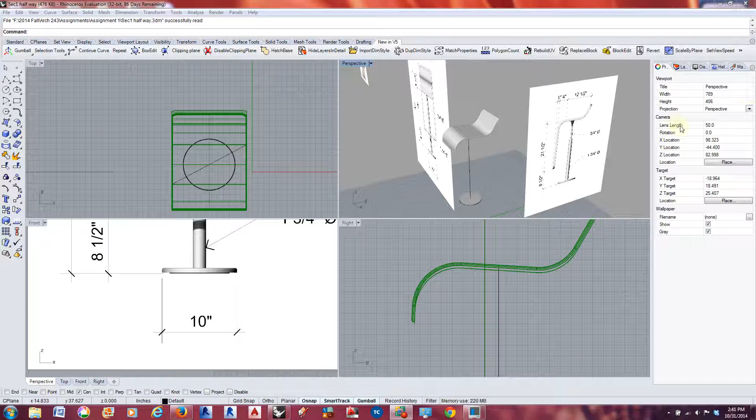In section 1 we pretty much went over creating the majority of the chair itself - the seat, the chair rail - and we got started on the base but have not worked through the rest of it. If you're in section 2, we got through some of the base but not the seat bracket, so this video will be a bit of a review for you.

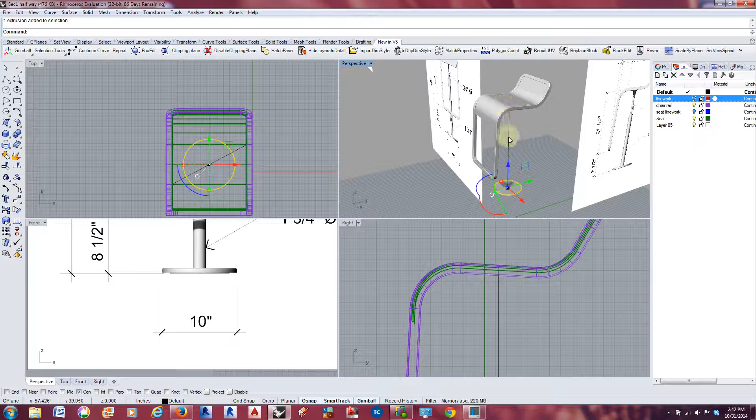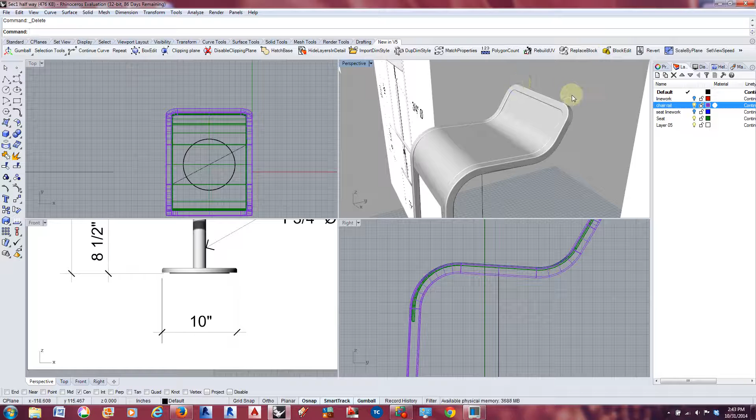I'm going to turn off my chair rail, and note that this little section here can be deleted as well - it does not need to be there. That's from when we split the line or the seat surface before offsetting it, which split this surface from the protruding one and left this little bit, so I went ahead and deleted that.

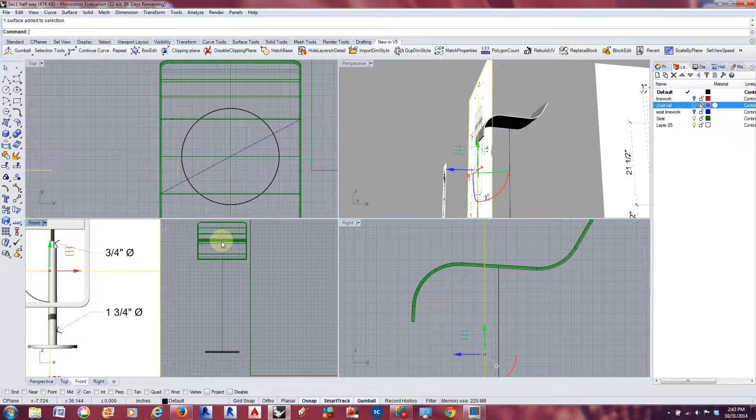In class we talked about getting this line work across the center mark so we could draw a 30-inch line from the base of the seat down, so that we could start creating our base for the seat itself.

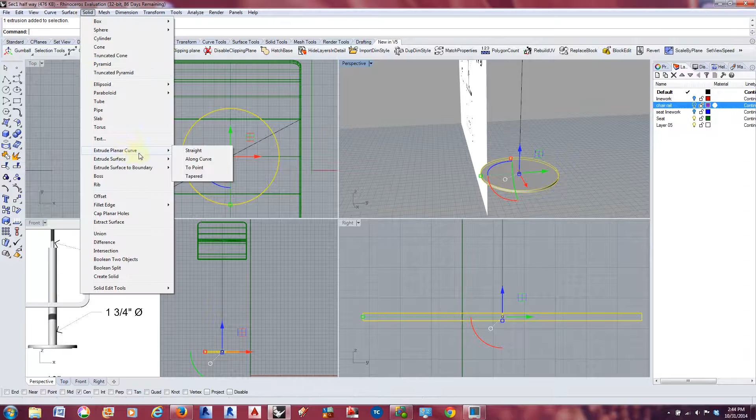We ended up creating a 9-inch diameter circle, then extruded it using the extrude planar curve straight tool to create the initial base, and now there's a secondary base on top of that. That thickness was 0.25 of an inch.

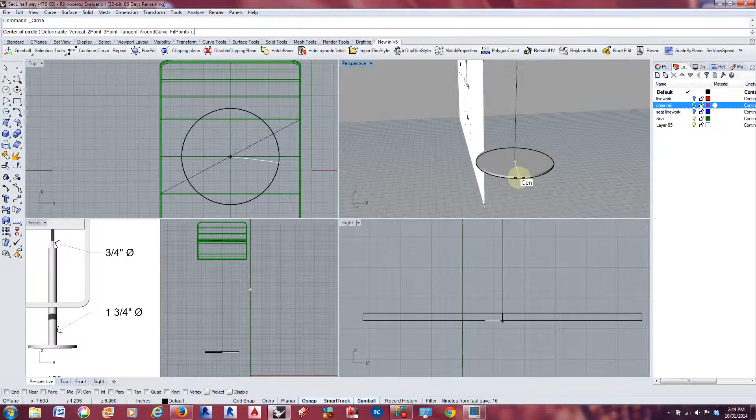Let's create an additional curve using the center snap - hover over the top portion to snap to the center of the top plane, then set our diameter. If it says radius, it'll be 5 inches; if you click diameter, it says 10 inches. You have to manually put that in though, so I'm going to use a diameter of 10 inches if you haven't already.

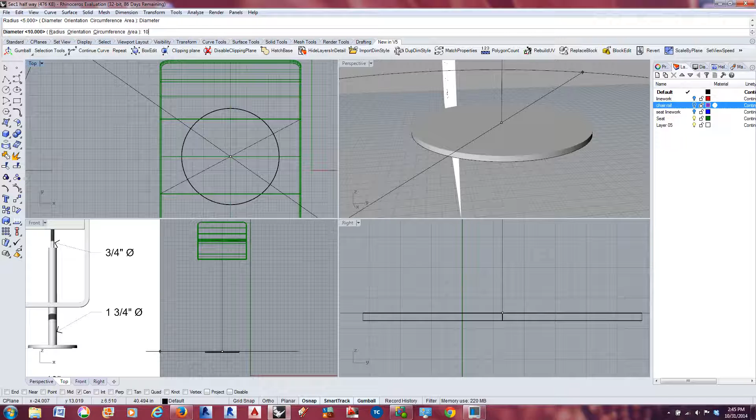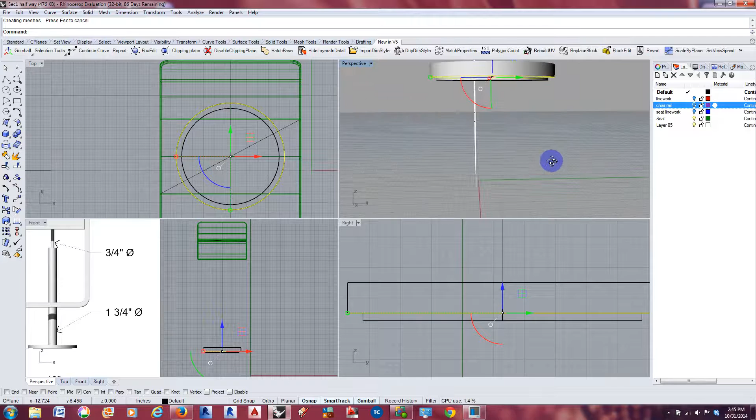It creates a 10-inch diameter circle, which we can extrude with planar curve straight, 1 inch. That gives us a nice solid surface there. Let's double check that's indeed what we wanted, and move it behind our object here.

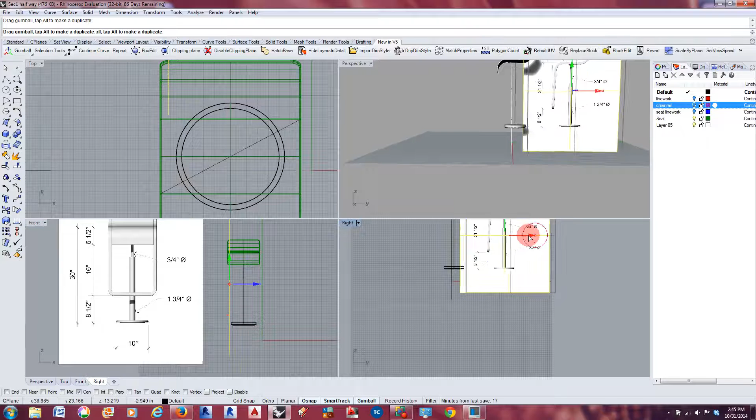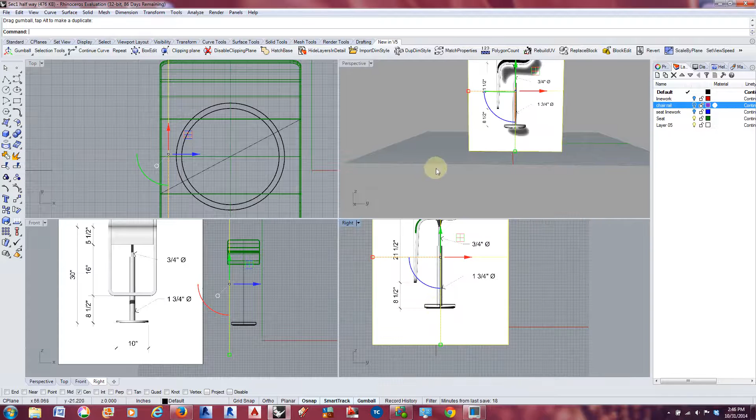Okay, well it looks like maybe it should be more like 1/8 of an inch and 1/2 of an inch, so let's just redraw those. I'm going to delete all of that.

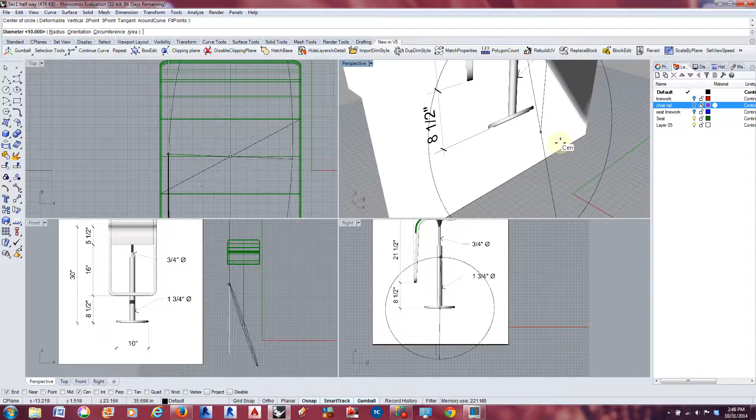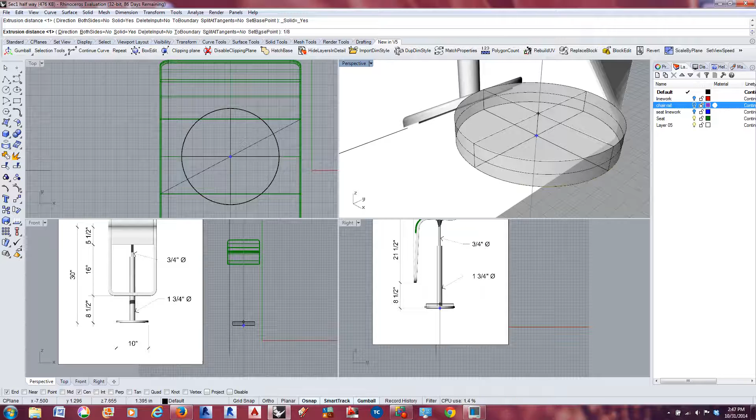I'm going to create a curve, circle, center radius, with end snap on, snapping to the end of that line we created. Again, a 9-inch diameter, then we create a solid extrude planar curve, and let's try 1/8 inch. That's starting to look a little better there.

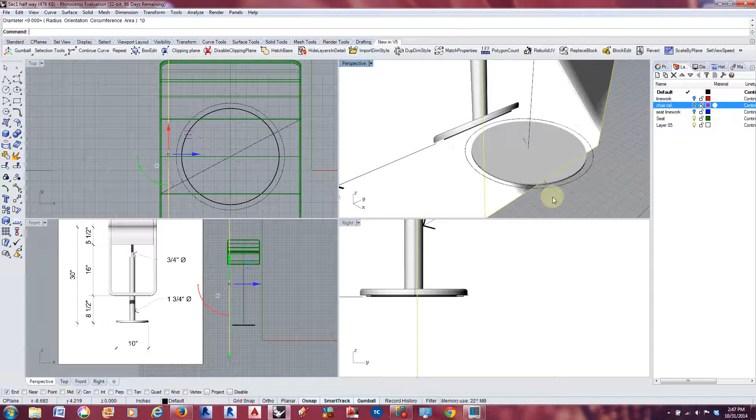Let's create another curve, using the center snap, and type in 10 inches, then create the solid extrude planar curve straight - we're going to try 1/2 inch this time. And that looks to be about right.

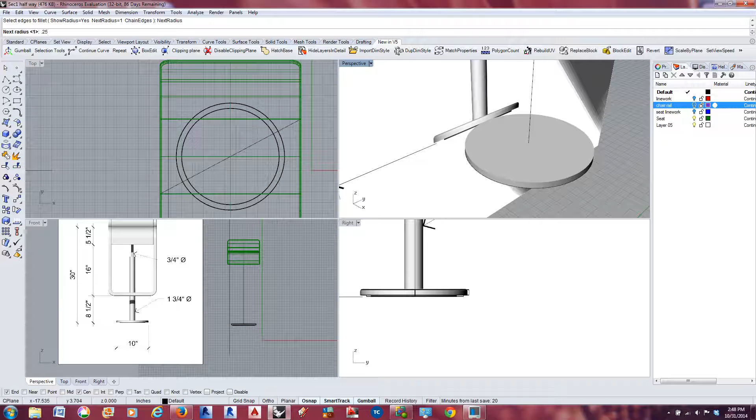So we can go ahead and fillet the edge, making sure our radius is probably 0.25 of an inch. We select that top edge, hit enter, and just put a slight curve on it.

The next phase is to create a cylinder that extends up this line work. In theory we could create a circle and extrude it up, but we could also just go ahead and create a solid cylinder in its place.

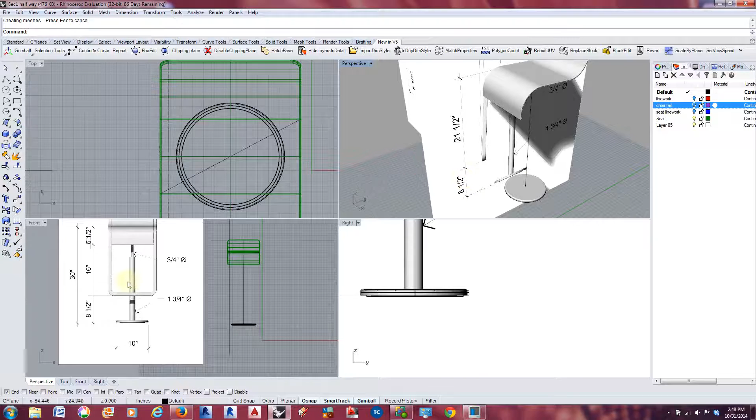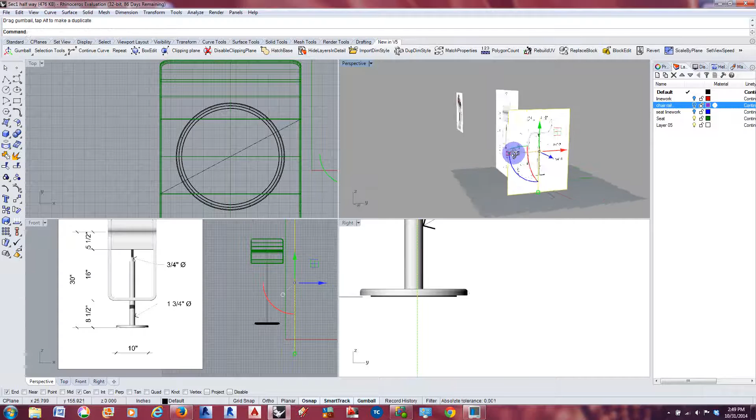But first I need to know the dimension between here and here, since we never made this section to scale. So I'm going to move this forward and utilize the dimension linear tool.

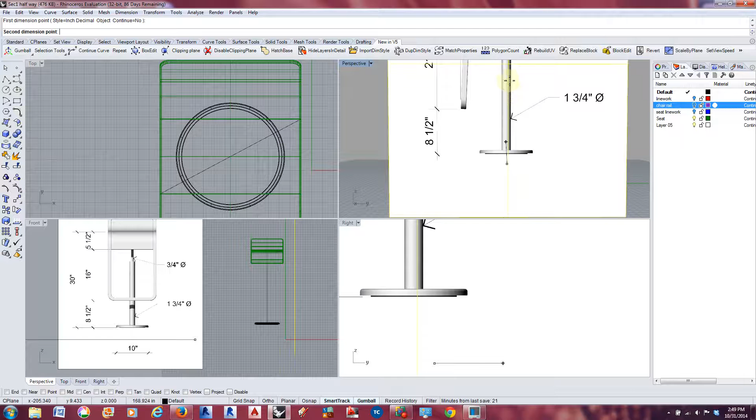I'm going to take off my end snaps and center snaps, and just figure out the dimension between the base of this - whoops, I should be doing this in my right side view. Let's right click to repeat the command, holding shift or using ortho snap to get that straight, and we can see that that's roughly 20 inches.

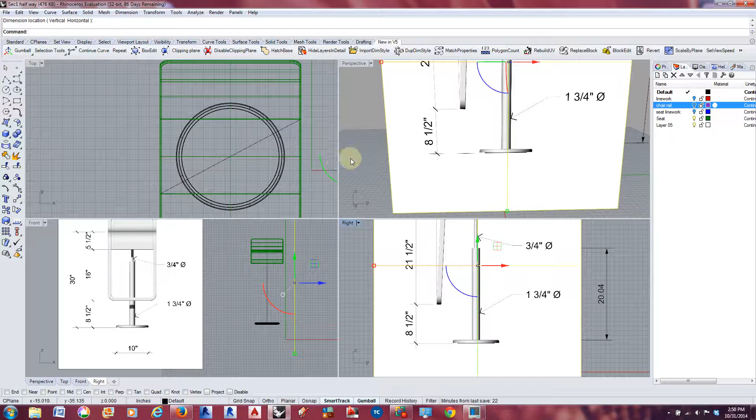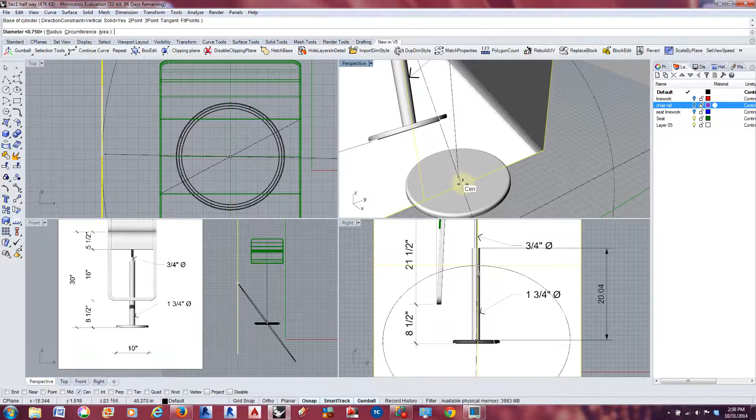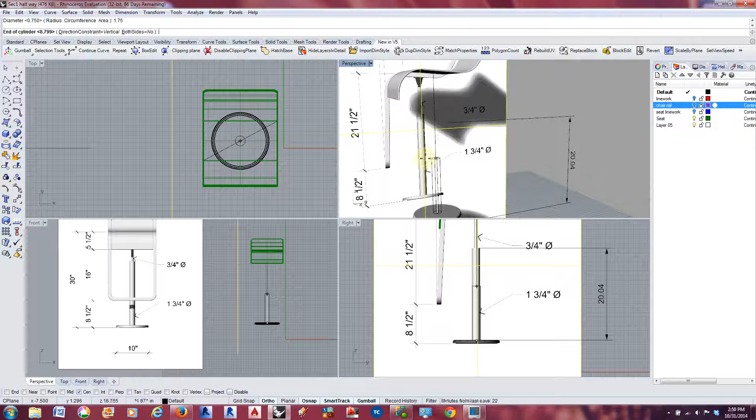Now that we have that information, we can create a cylinder. We'll turn center point snap on again and snap to the center of this line. From our drawing we can see we have a 1 3/4 inch diameter, so we type in 1.75 and hit enter. As we move this up, holding shift and the right key to pan in 3D, we type in 20, giving us the 20 inches we need.

While we're here, we can fillet this edge as well - let's go with 0.25 of an inch and see what that looks like. It looks fairly good, so we're going to stick with that.

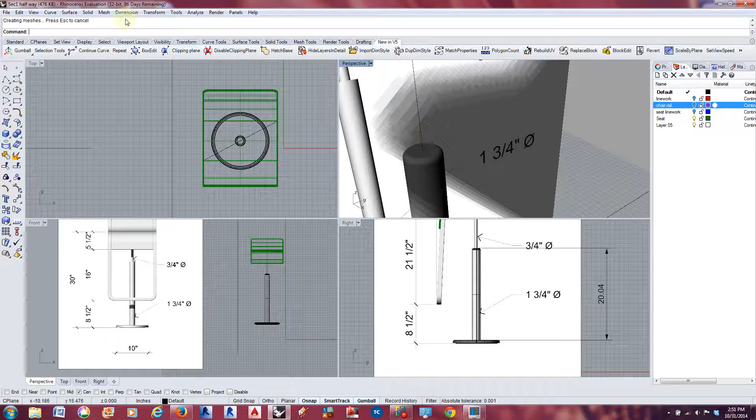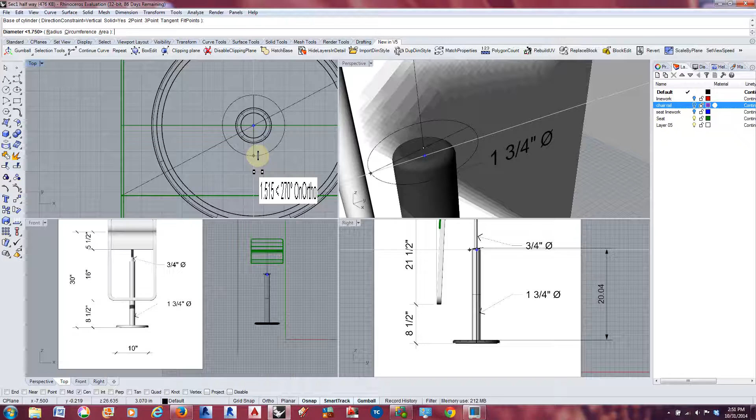Now we can create an additional cylinder using my center snap again in my 3D view here, and switch over to the top view to define the diameter as 0.75 of an inch. Now in our right side view we just get it so that new cylinder is moving up into the chair itself.

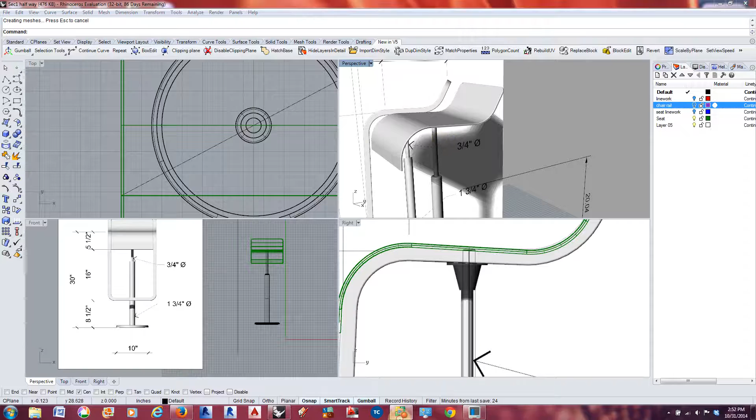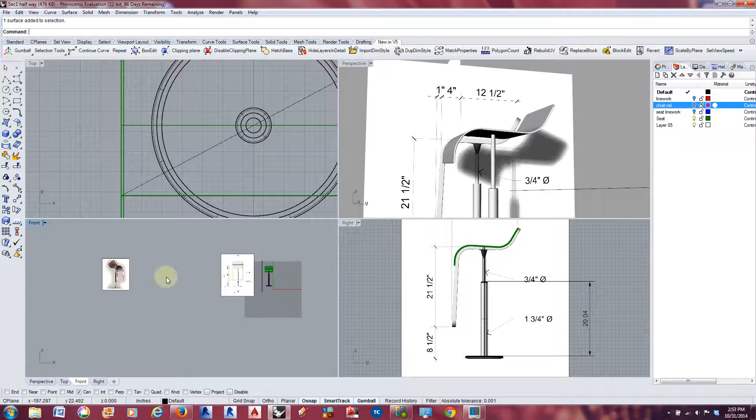Now that we have the majority of the stand built, let's focus on the bracket that allows this thing to rest on that seat. From this photograph we can see what's going on: we've got two rectangular elements here, and then another cylinder that flows into those two rectangular elements, and then we have this cone-shaped object to do.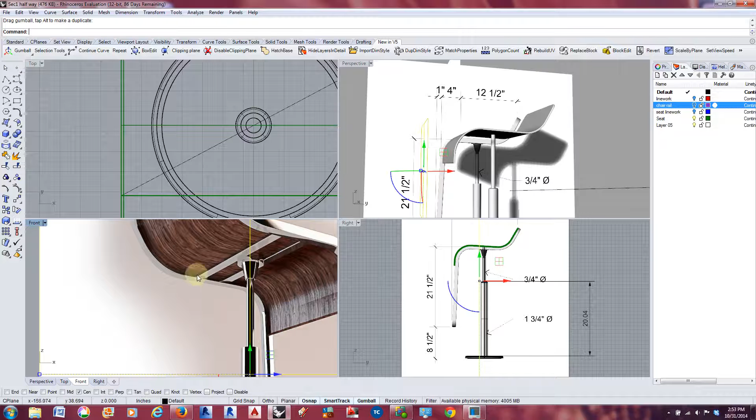Our first step is to create these two rectangular structural pieces that support the chair itself. I'm going to turn my chair rail back on so that I can see where I need to start and stop these chair supports.

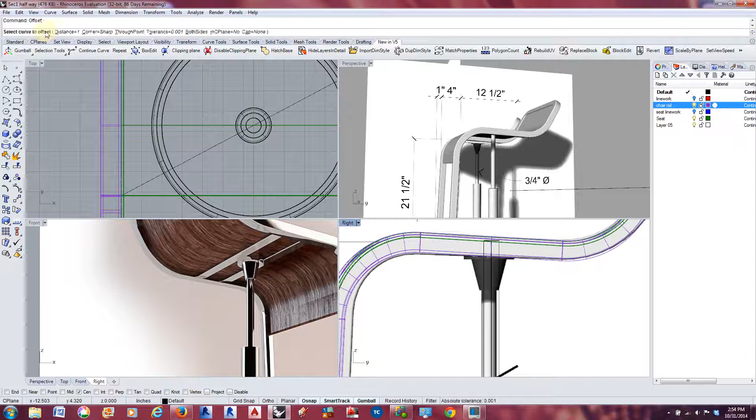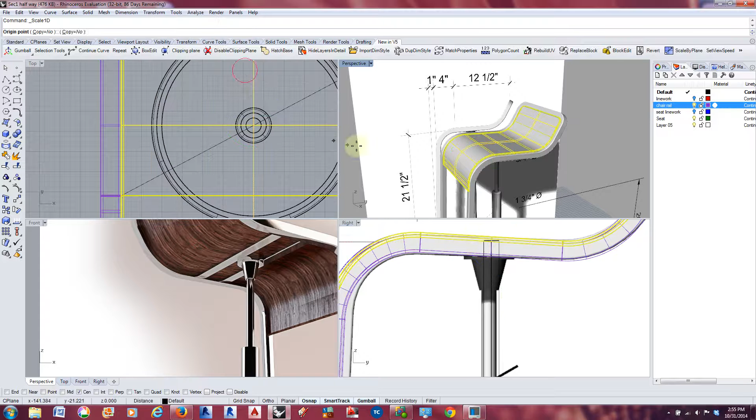Let's see if we can just thicken that surface up a bit. Go ahead and utilize the 1D scale here and see if that's going to work for us.

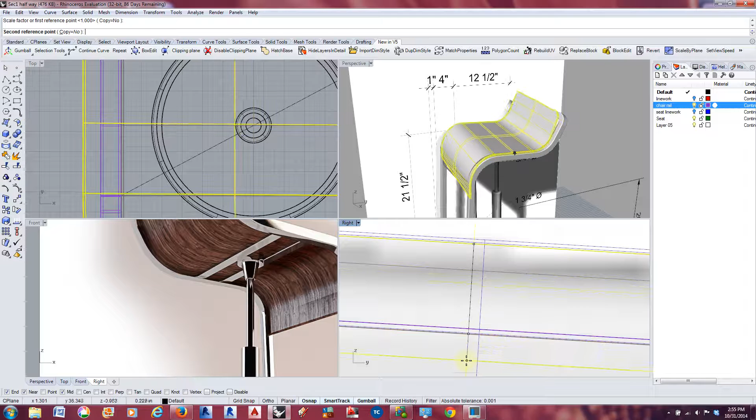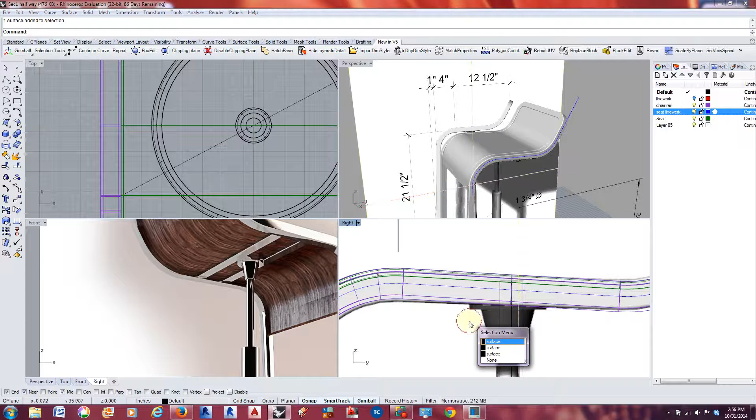If you have a small seat from section 1 or a thin layer, it'll be okay. I think in section 2 we beefed that up a little bit. If we wanted to make that even thicker, we'd have to re-extrude this surface and use the surface offset tool and make that thicker. I'm not going to go ahead and do that in this video, but I will move on to continuing with our creation of these guys here.

We're going to utilize our rectangular corner to corner and make sure we click rounded, and probably do 1/2 inch by 1/2 inch, and leave our radius at 1/8 of an inch.

That's not doing it for me. I think maybe let's try 0.5 by an inch. I think that looks a little bit better. I'm just going to rotate it in place here.

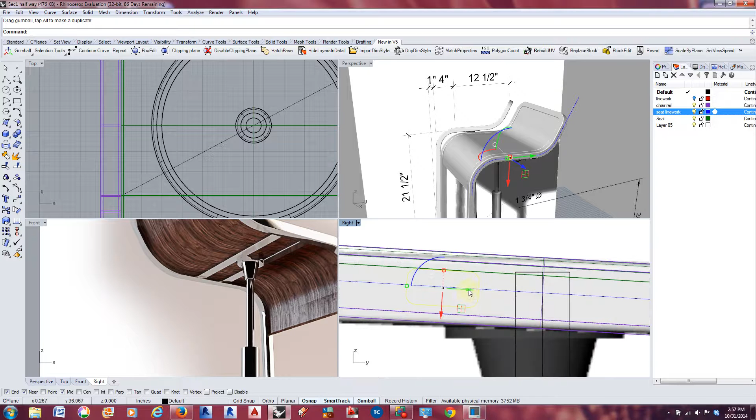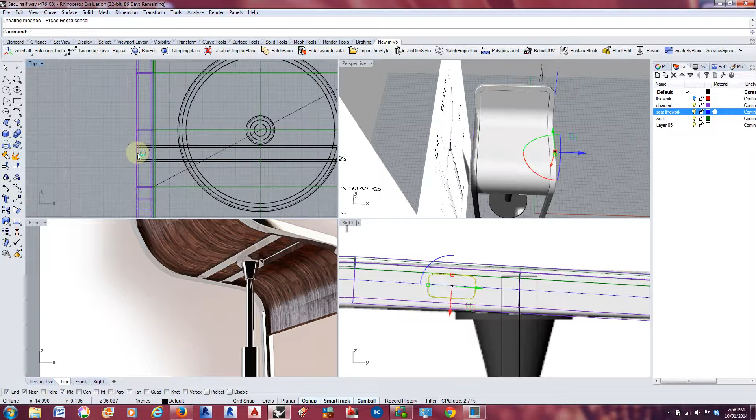Now we want to extrude this planar curve straight. Let's go over to our top view. I'm in wireframe in this view, which makes it a little bit easier to work. And I can go ahead and dimensionally scale, or transform scale 1D, this object.

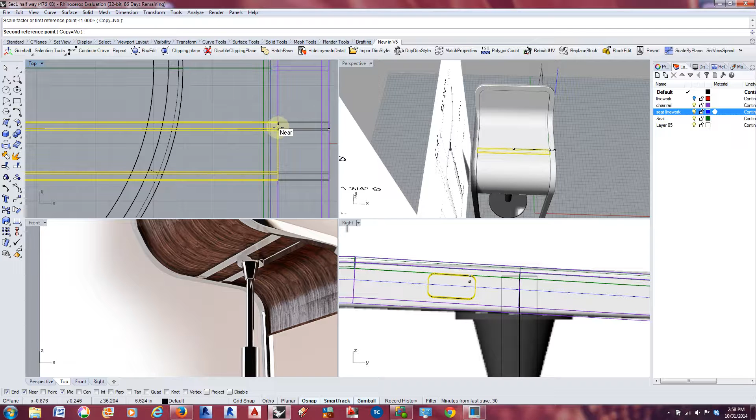And shrink him down so that he's just touching basically the chair rail itself.

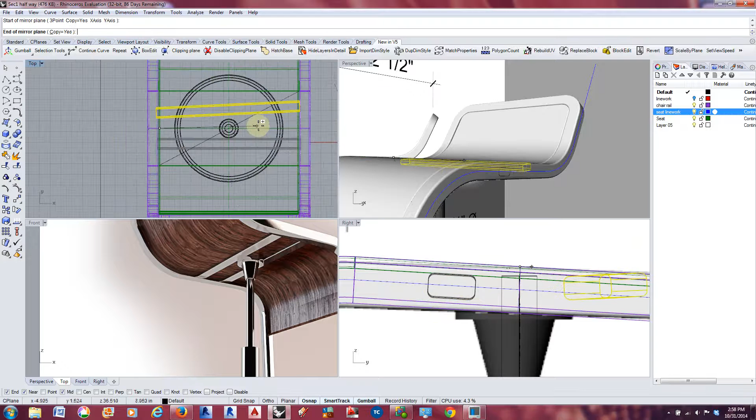Now I can go ahead and mirror him along this axis to create a second one. So now they're evenly spaced between this.

We can go ahead and make sure that these are on their own layer. Let's go ahead and rename that layer to be the seat bracket.

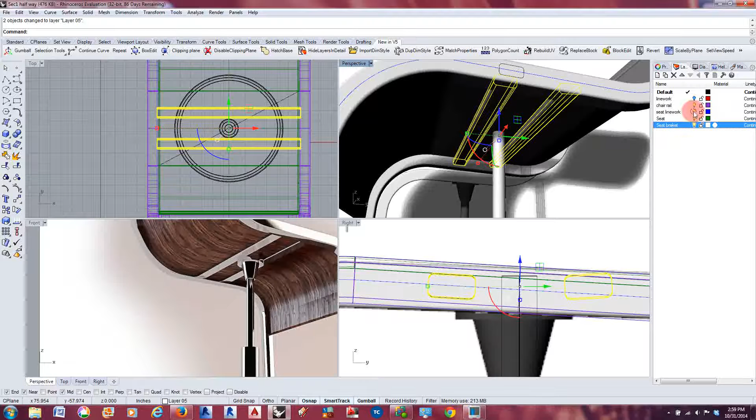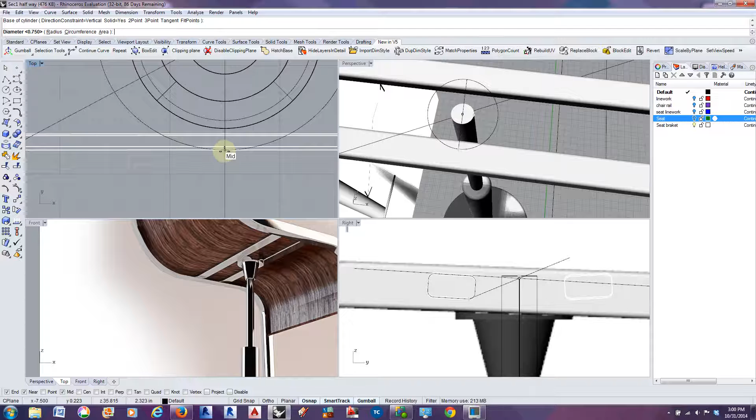That allows us to then create an additional cylinder starting at that end point. We just want it to intrude a bit on those rectangular sleeves—except not do that. So let's try that one more time.

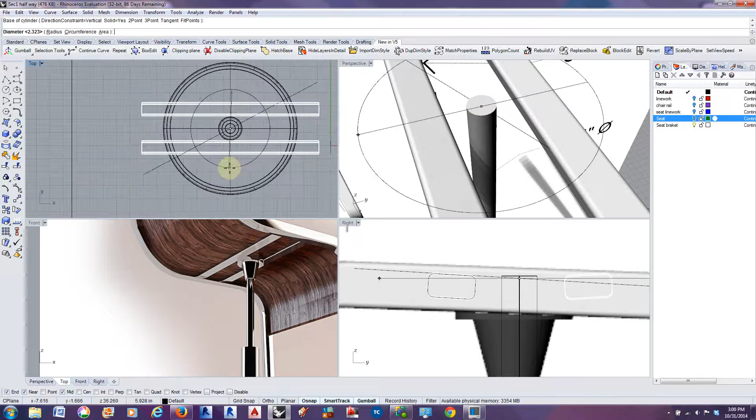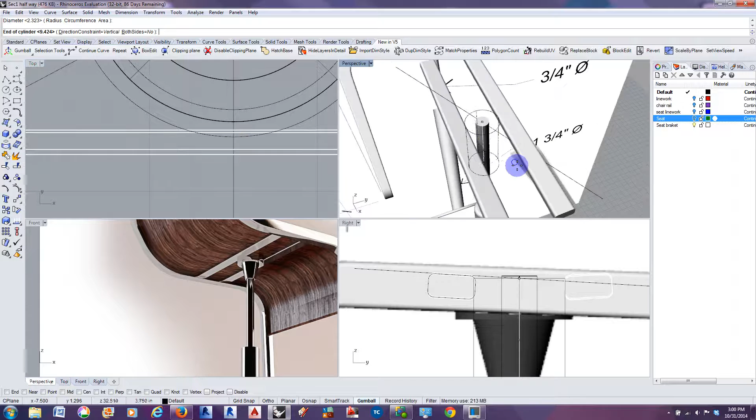Let's grab our solid and create a cylinder at that midpoint. I'm just taking off all my object snaps and my smart track so that I can get this to just be intersecting this thing a little bit, without causing any hiccups there with the rest of the modeling object.

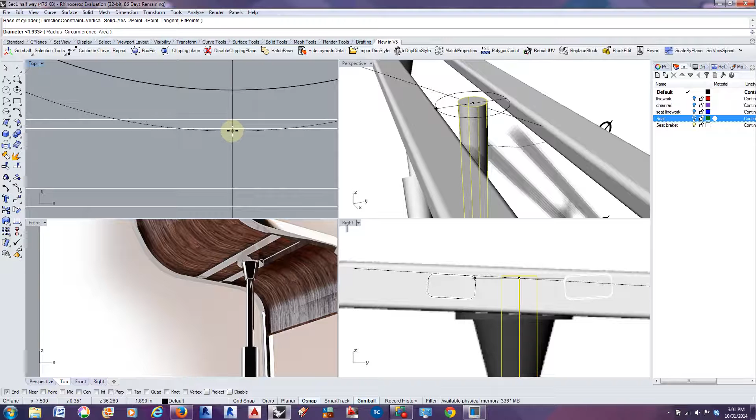Maybe it comes down 0.75 of an inch. And I went up 0.75 of an inch. So I need to go ahead and create that one more time. Put my end snap on. Now let's say negative 0.75 of an inch.

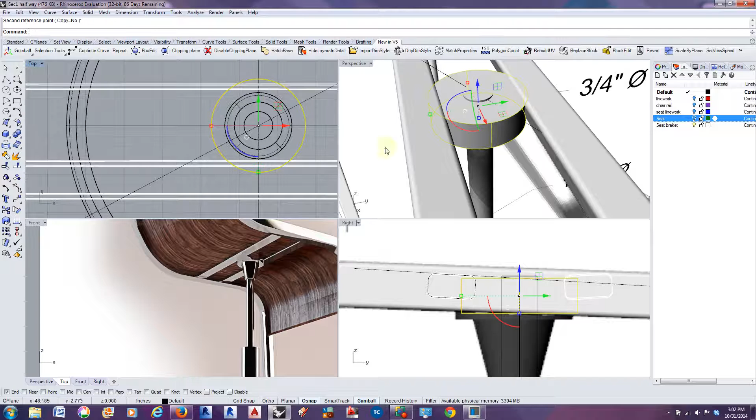It doesn't quite look like it's big enough. So I'm going to go ahead and scale this in two directions, just to make it a bit bigger. That looks about good.

We can utilize the truncated cone to create this cylinder here, or you could utilize two circular line works and loft between them. I think I'm just going to utilize the truncated cone.

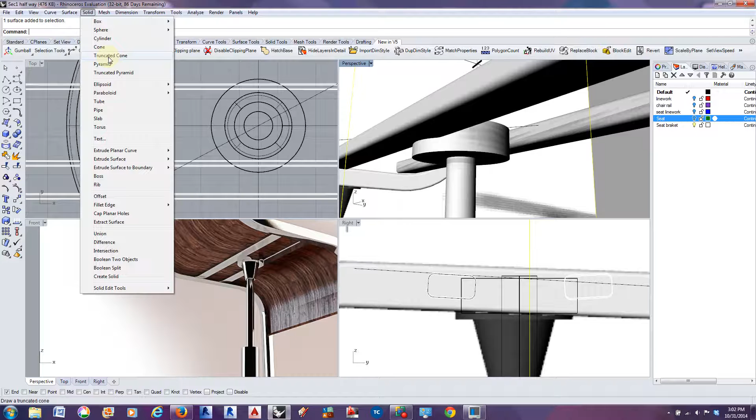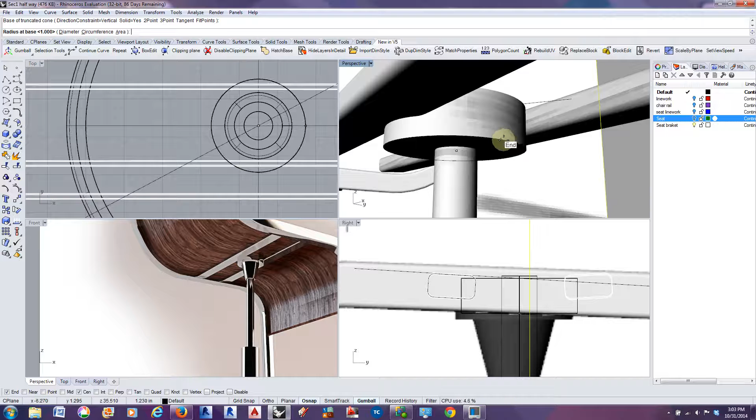With my center snap on, I'm going to center it to the center line here, and it looks like it's not quite as large as the other piece.

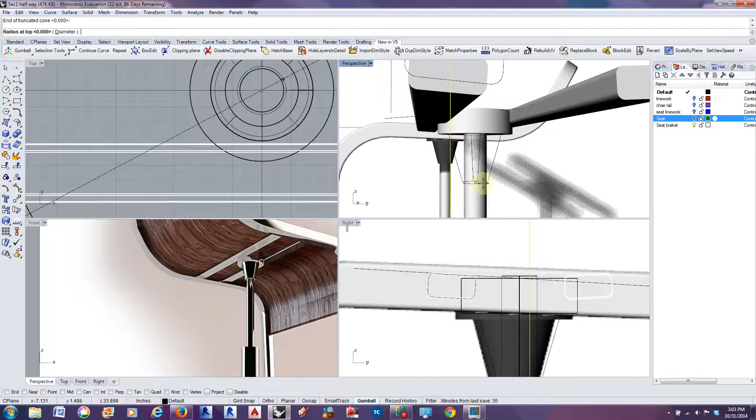And we're going to come down, and that looks pretty good to me.

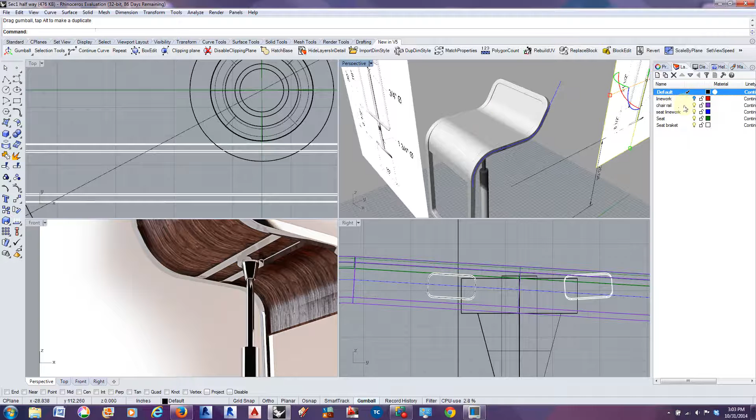I'm going to turn back on my chair rail and my seat, and move this out of the way. Turn off my seat line work, and let's move this line work to the seat line work as well. Go ahead and delete that dimension.

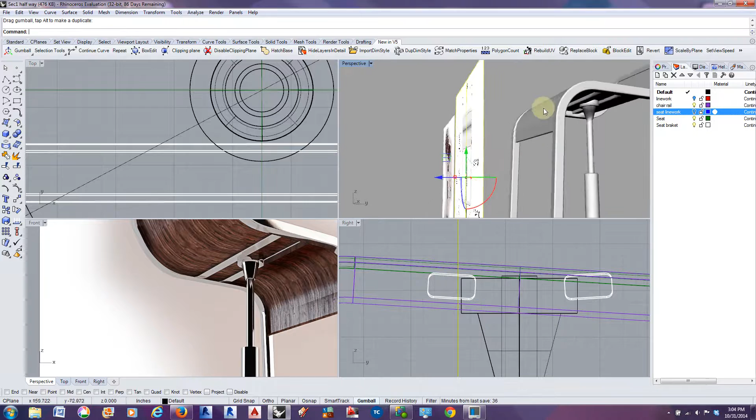And there you go—we've modeled the LEM stool completely. In class, we'll discuss how to apply materials to the various objects.

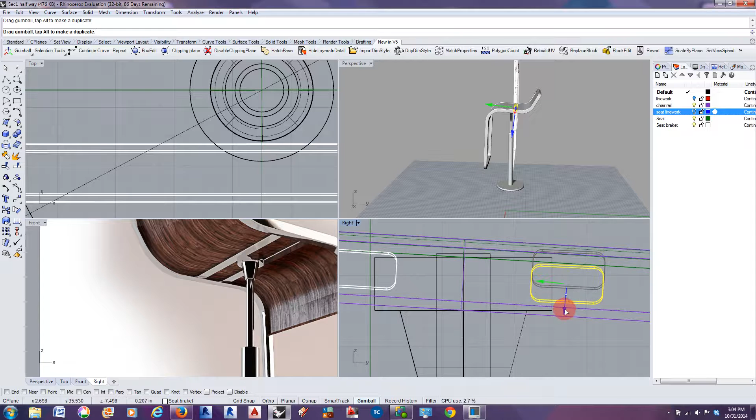Now that I'm looking at this, this is not quite drawn the way that I want it to be drawn. So I'm going to go ahead and rotate that and move him down a bit so that that starts to make some sense. There, that's looking a little better.